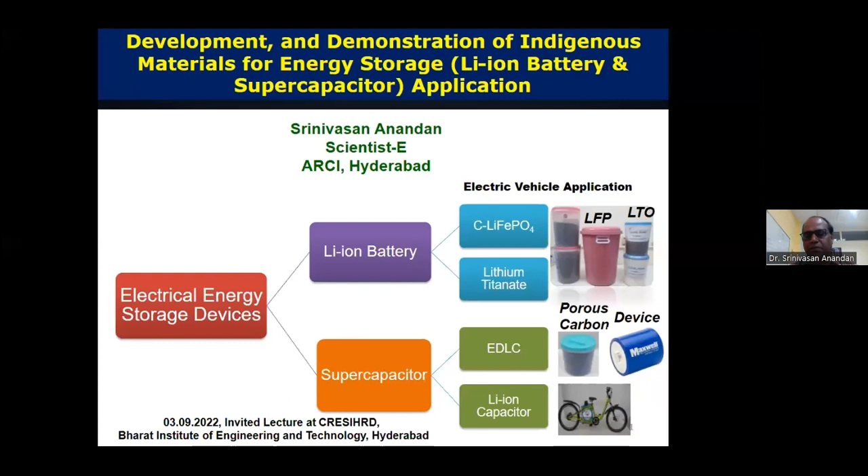Let me briefly explain about my institute. ARCI is the International Advanced Research Center for Powder Metallurgy and New Materials, an autonomous R&D institute under the Department of Science and Technology. The unique mandate of ARCI is transforming laboratory research into technology and transferring the technology to industries. ARCI has in operation 11 centers of excellence, of which 9 centers are located in Hyderabad in its main campus, and 2 centers are in Chennai.

In ARCI, we mainly focus on the development of material and new process. Subsequently, we work on upscaling of the developed process at lab scale and the fabrication of prototype. And then later, we demonstrate the prototype for field application and transfer the technology to interested industries.

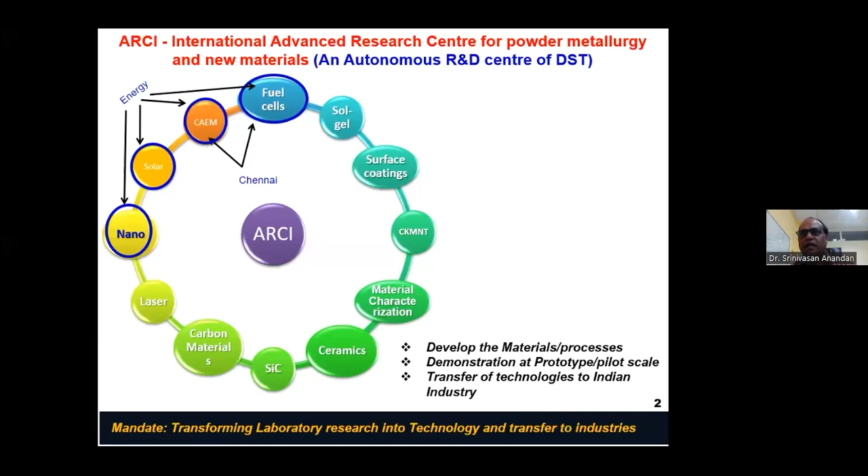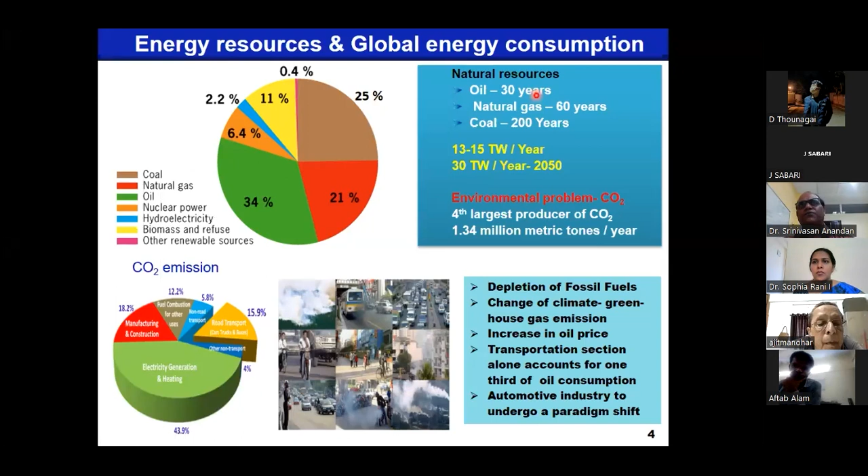The major issue is, when you are meeting this energy demand using fossil fuels, the availability of this fossil fuel is very limited. For example, oil is available for 30 years, natural gas for 60 years, and coal for 200 years.

Currently the energy requirement is 13 to 15 terawatt per year. But if you see the future energy requirement, it's nearly 30 terawatt, nearly double the requirement of what we are using right now. But if we have limited fossil fuel sources, then it is a big challenge.

And then we are forced to move out from fossil fuel to renewable energy sources to meet our energy requirement. Another major issue is that when you are using fossil fuel, a lot of greenhouse gas emission is happening. As per statistics, we are the 4th largest producer of CO2 in the world. We are emitting nearly 1.34 million metric tons per year. That is a huge amount.

There are 2 things. One is we have to move from fossil fuel to renewable sources because of depletion of fossil fuel and then climate change, global warming, all the issues happening because of burning all the fossil fuels. The other thing is, recently everyone observed that there is an increase in oil price, and the statistics say that the transportation sector alone accounts for 1/3 of oil consumption. So we keep importing oil and we are spending huge money on the oil import.

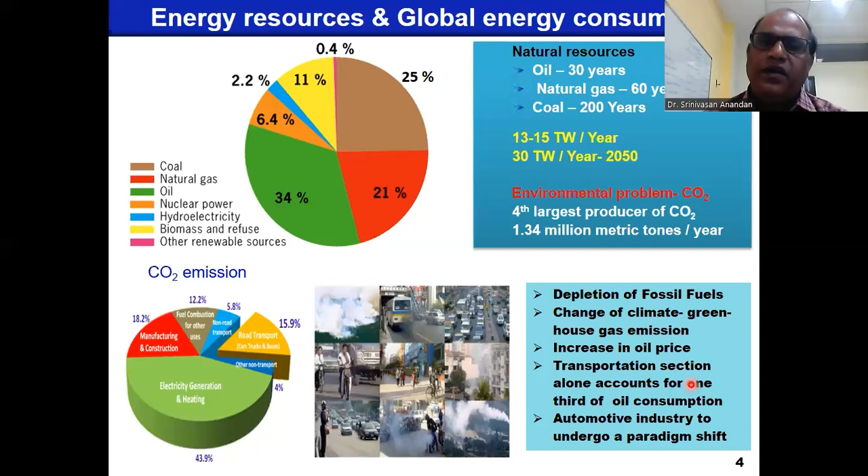And this is the high time we have to switch over from fuel-based vehicles to electric vehicles. These are the two important points. One is why we want to move from fossil fuel to renewable sources, and then the transition of fuel-based vehicles to electric vehicles. These are the two important points we have to consider for our future energy requirement.

Lithium-ion batteries and supercapacitors are considered the promising energy storage devices. Both have their own advantages and disadvantages. Lithium-ion batteries store energy through electrochemical redox reaction, so a Faradaic reaction is involved during the charging and discharging process, whereas supercapacitors store energy at the surface of the electrode. It is purely a non-Faradaic reaction. There is no chemical reaction involved during the charge and discharge process.

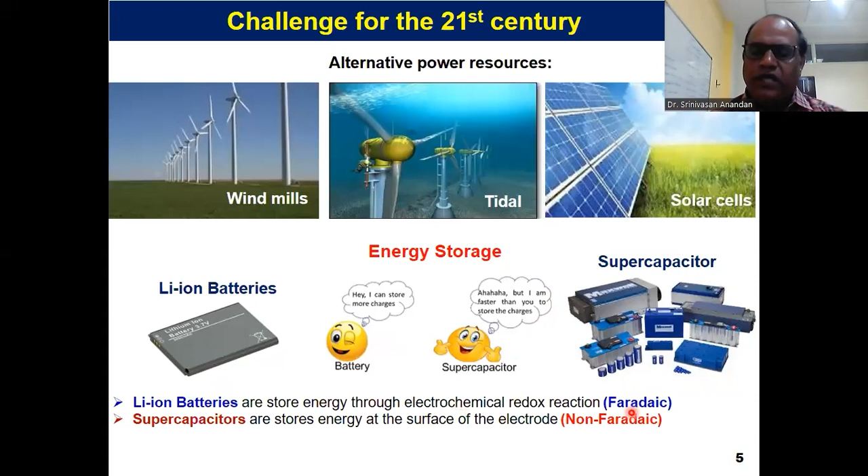Next couple of slides, I would like to explain the basic components involved in the battery and the working principles of the lithium-ion battery. When it comes to the definition, a battery is a transducer which converts the chemical energy of its active material into electrical energy through electrochemical redox reaction. Batteries are classified into two categories: primary battery and secondary battery. The former is not rechargeable, whereas the latter is rechargeable.

When it comes to components, there are four important components in the lithium-ion battery. The anode material: usually graphite, a carbon-based material, is used as the anode material. The second one is the cathode material. Usually lithium-based compounds are used as the cathode material. When you want to prepare the electrode, you have to mix it with the binder and carbon black and then coat it on aluminum foil; you will get the cathode electrode. Similarly for the anode, if you coat it on copper foil, you will get the anode electrode.

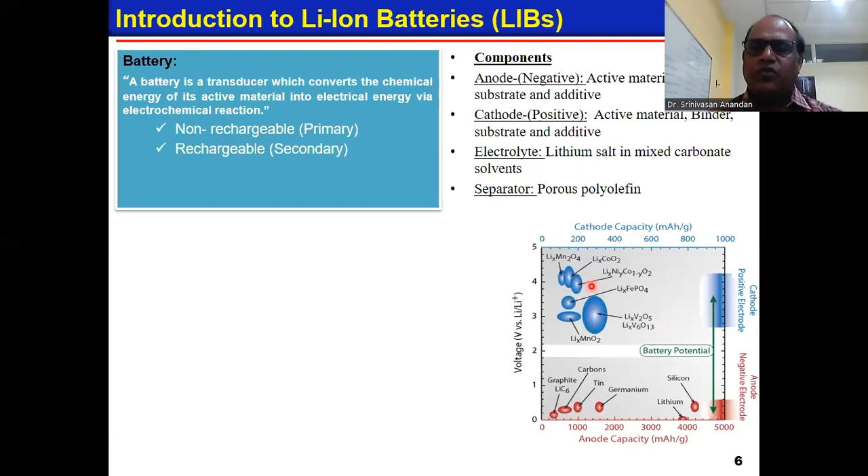The third important component is the electrolyte. Usually a lithium salt dissolved in a carbonate solvent is used as the electrolyte; LiPF6 is usually used in all lithium-ion cells. It is ionically conductive and electrically non-conductive. And then the separator, which is used to avoid a short circuit between cathode and anode. A polymer film is used as the separator. This slide shows the various cathodes and anodes which are extensively used in lithium-ion batteries. The high voltage compounds are cathode, and the low voltage compounds are anode material.

So one may ask, what is the advantage of the lithium-ion battery over other secondary batteries? If you look at the energy density of the lithium-ion battery, it is in the range of 150 to 250 watt-hour per kg, because the cell voltage of the lithium-ion battery is high. Whereas for other secondary batteries like nickel-cadmium, lead acid and so on, the energy density is not even 100 watt-hour per kg, because their cell voltage is very low.

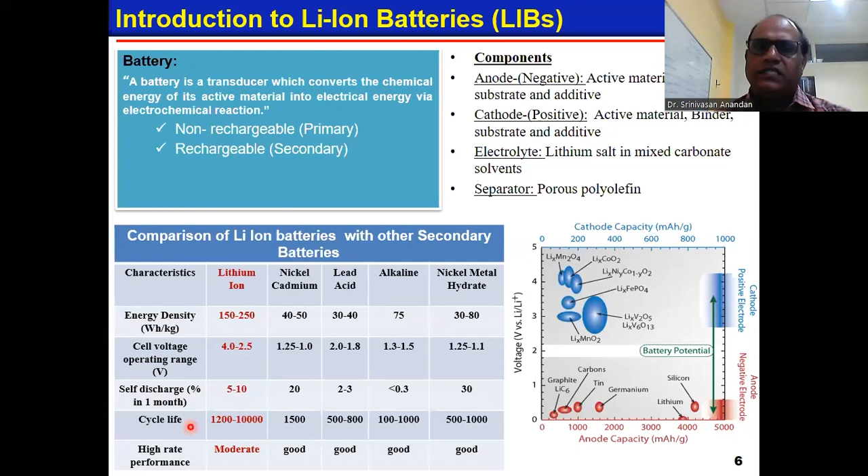Similar to energy density, other factors including self-discharge, cycle life and high rate performance are also superior compared to other secondary batteries. That is why lithium-ion batteries are extensively used in all electronic items. So in the next two slides, I'll be explaining the basic principle involved in lithium-ion batteries. As said in the earlier slide, the lithium-ion battery has four important components.

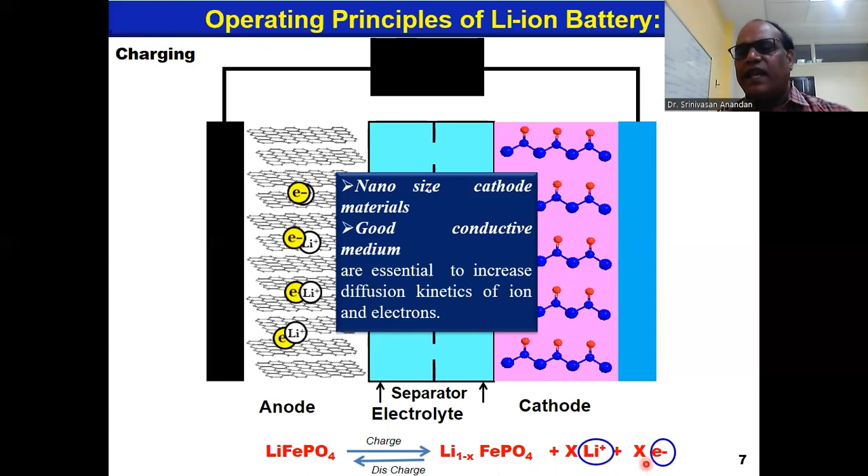Lithium ion is deintercalated from the lithium iron phosphate, and whatever lithium is generated from the cathode is intercalated into the negative electrode, and whatever electron is generated is used for charging our devices. This slide shows what is happening during discharge. Exactly the reverse thing is happening. The electron generated from the oxidation at the anode side is powering our devices. The lithium ion which was intercalated during the charge process goes back to the cathode side, and this is the mechanism involved.

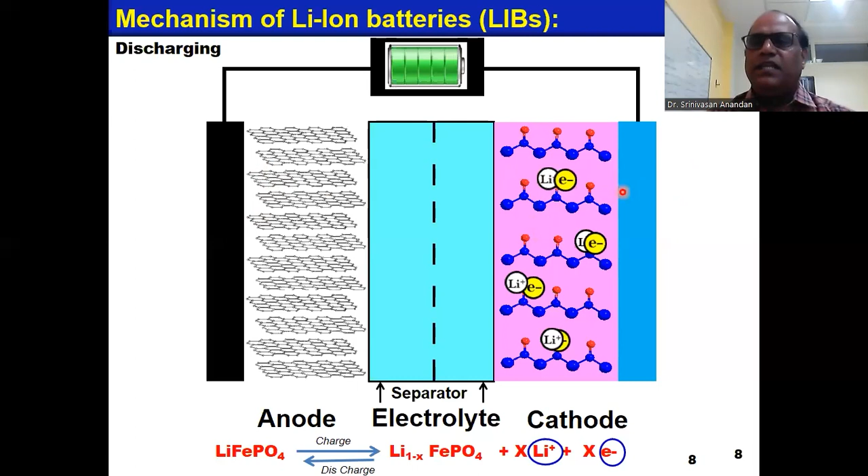So simply speaking, the charging and discharging process involves lithium ion shuttling between the cathode and the anode. During charging, intercalation takes place from cathode to anode, and during discharging, the intercalation of lithium ion takes place from anode to cathode. This is mainly because of lithium ion shuttling between cathode and anode.

Forbes India has given a very interesting statistic about the cost comparison between the fuel vehicle versus the electric vehicle, considering an average person drives 10,000 kilometers per year. For example, the cost of the electric vehicle is about 8 lakhs. Nearly half of the cost goes to the battery. Battery cost is 3 lakhs. When you are charging your electric vehicle, per charge you have to spend nearly 50 rupees. When you charge one time, you can drive nearly 100 kilometers. For driving 10,000 kilometers per year, you have to spend only 5,000 rupees per year.

On the other hand, the cost of the fuel-based vehicle is less than the electric vehicle. Considering a mileage of 10 kilometers per liter when riding within the city, and a fuel price of about 100 per liter, if you calculate the running cost for driving 10,000 kilometers per year, you have to spend nearly 1 lakh per year. So if you compare the running cost, the running cost for driving the electric vehicle is 20 times less than the running cost of the fuel-based vehicle. That is the significant advantage of using the electric vehicle.

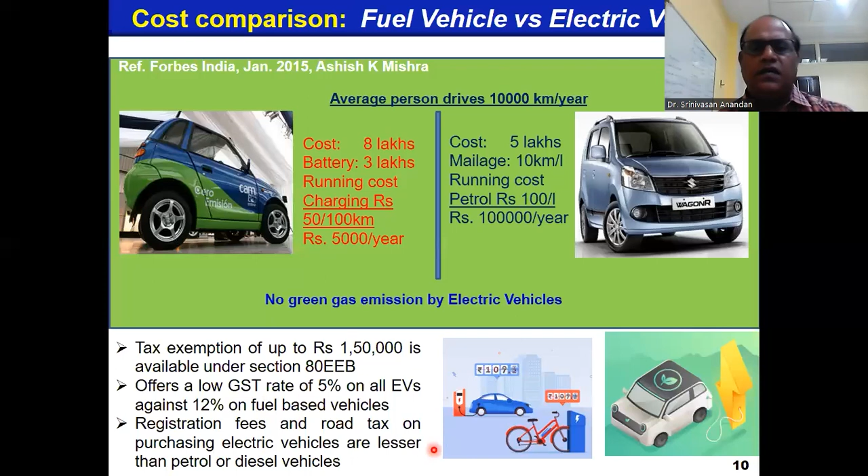The other advantage, as you know, is that there is no greenhouse gas emission when you are using an electric vehicle. And recently the government is giving a lot of benefits to customers who are buying electric vehicles. There is a tax exemption of up to rupees 1,50,000 available, and there is a reduction in GST, as well as registration fees and road tax. This way the government is trying to encourage customers to buy electric vehicles.

So you may ask why we need indigenous battery material technology. As I said earlier, current EV technologies in India are operated with imported lithium-ion battery packs. There is no single manufacturer in India to produce lithium-ion cells. Whenever you import lithium-ion batteries, it is always expensive. So in order to bring down the cost, indigenous development of battery technology is the need of the hour to bring down the cost of the lithium-ion battery or cell module.

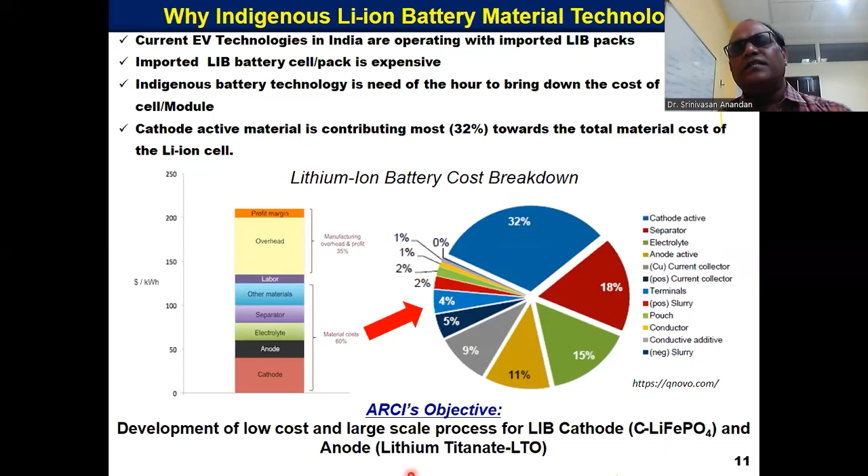And if you look at the components of a lithium-ion cell, there are various components in the lithium-ion battery. So which component or which area do we have to concentrate on to bring down the overall cost of the lithium-ion cell? This pie chart will give you the idea. If you see the pie chart, nearly 43% of the cost comes from the cathode and anode material. If we can develop cost-effective cathode and anode material, you can bring down the overall cost of the cell, and it will reflect in the final cost of the electric vehicle. That is where at ARCI we have been focusing on developing a low-cost, large-scale process for making lithium-ion battery cathode and anode material.

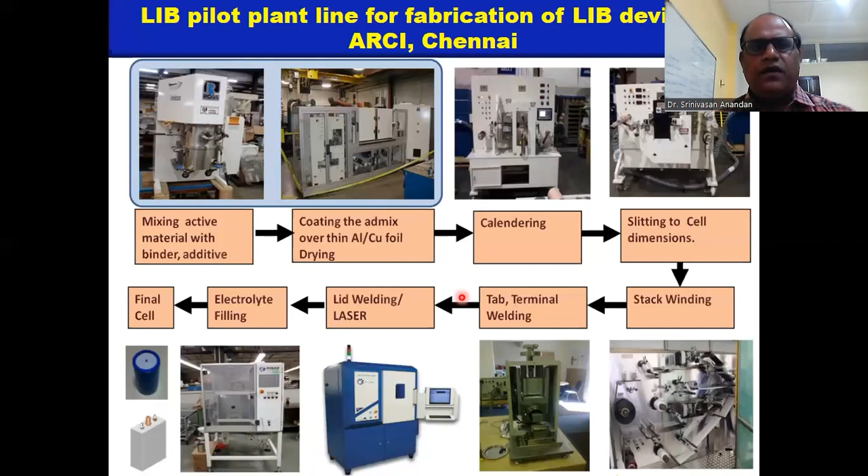So at ARCI, we have been working on two objectives. One is to set up a pilot plant facility for making lithium-ion cells. The other objective is developing indigenous material, which is used as raw material for making lithium-ion cells. This is the lithium-ion pilot plant facility which we have established at our ARCI Chennai Center. Starting from mixing, coating, calendering, all those processes, we have the equipment, and we have established this facility for converting powder into cells.

These lithium-ion based compounds are very sensitive to moisture and oxygen, and we have to use a humidity-controlled room for the fabrication of lithium-ion cells. We have established a 30% RH room and a 0.5% RH room for coating as well as lithium-ion cell fabrication. And we have extensively used the facility for making different capacities of lithium-ion cells, from 5 ampere to 50 ampere cells fabricated in our facility.

The thing is, whatever cells we made in our pilot plant facility used imported lithium-ion battery material. When you keep importing lithium-ion battery material, there are a lot of challenges. After some time, the supplier may not be ready to supply the material. Even if you insist on supply, the cost may be high. And suddenly some company may stop production. So you have to depend on someone for making lithium-ion cells. If you have your own lithium-ion battery material production, you don't need to worry about any supply chain issue for making lithium-ion cells. That is why we consider the development of indigenous materials very much essential to meet our requirement.

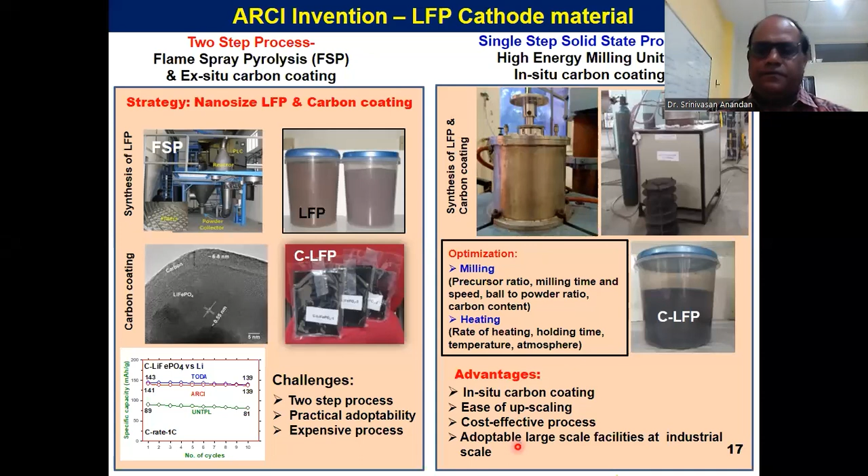This slide shows the physicochemical properties of our ARCI developed LiFePO4 material. As you can see, we were able to synthesize 50 to 100 nanometer size LiFePO4 particles, and the TEM image shows that the LiFePO4 particles are embedded in the carbon network. The carbon coated on LiFePO4 is around 5 to 6 nanometers, it is amorphous in nature, and the material has a pure olivine structure without any secondary phase formation. Here we have listed the other physicochemical parameters.

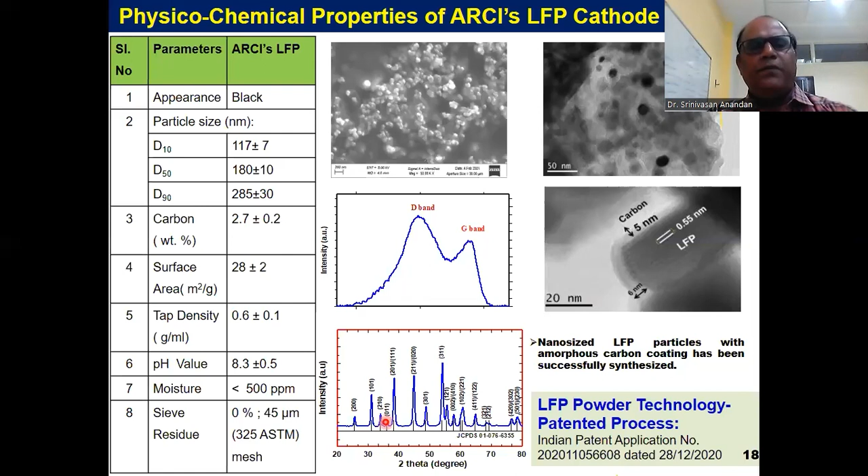Once you have developed the material at lab scale, technology is not only about lab scale R&D. You have to upscale the process developed at lab scale, so we tried a large scale demonstration of our ARCI developed LiFePO4 material. We don't have a large scale facility, so we tied up with a private industry and used their milling as well as furnace facility.

With that facility, we were able to demonstrate our ARCI developed LFP process for making 20 kg LFP per batch. This is the large scale attrition milling unit where 20 kg milling of raw material is possible, and we have done milling of 15 kg LFP raw material.

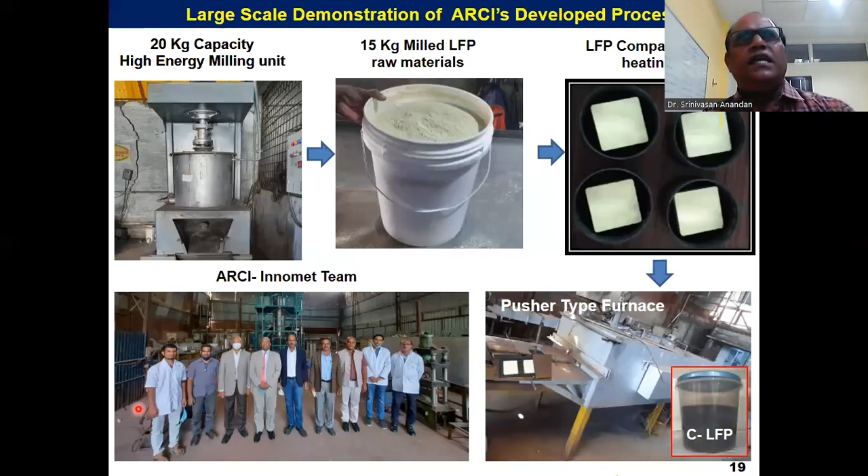Subsequently, we did the compaction of the milled material, since we apply vacuum during the heating, and if you use powder, it may fly. That is the reason we compact, and then the compact is heated in the furnace to get the final LiFePO4. This is our entire team, the industry as well as ARCI team involved in the production of LiFePO4. Here I would like to show the performance of ARCI LFP material at coin cell level as well as in actual lithium-ion cells.

This shows the typical charge discharge profile of LiFePO4. The capacity of ARCI LFP material at 1C, meaning 1 hour for charging and 1 hour for discharging, is about 139 milliampere hour per gram, which is close to the commercial material. Whereas at the high charging rate of 5C, with hardly 12 minutes for charging and 12 minutes for discharging, ARCI material is able to deliver more than 100 milliampere hour per gram, whereas the commercial material shows less capacity, even less than 100 milliampere hour per gram.

We wanted to evaluate our material in an actual lithium-ion cell, so we fabricated a lithium-ion cell using graphite as the anode material, and this is the capacity.

So what we have done is we have compared the performance of a cell made from the commercial LFP material. This is the capacity of the ARCI cell, which is giving 1.5 ampere hour, whereas the cell made from commercial LFP gives 1.8 ampere hour, slightly higher than the ARCI cell. But if you look at the capacity retention, the ARCI cell was able to retain 92% of its initial capacity, whereas the commercial cell was able to deliver only 77% of its capacity.

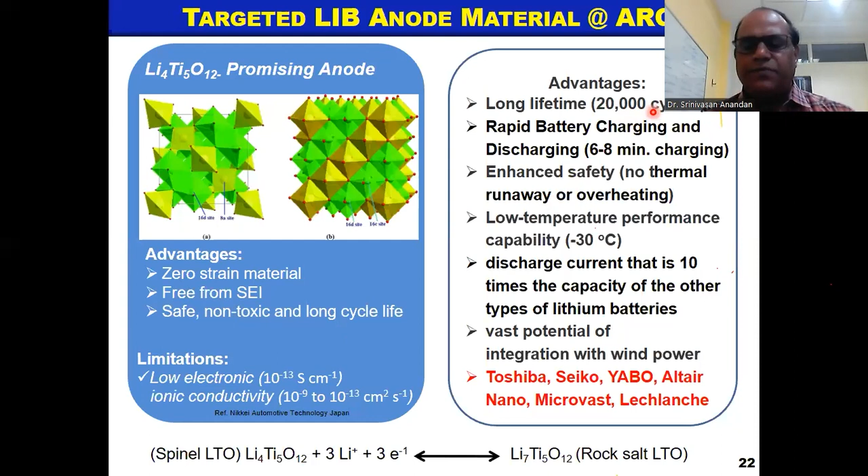Considering that aspect, we have been working on the development of lithium titanate anode material. We adopted a similar solid state process for the synthesis of lithium titanate, and we used a high energy attrition milling unit for milling the lithium and titanium raw materials. Subsequently, we did the heating to synthesize lithium titanate. And when we validated the performance, both commercial and ARCI-developed LTO material showed performance of more than 160 milliampere hour per gram. The important thing I want to highlight here

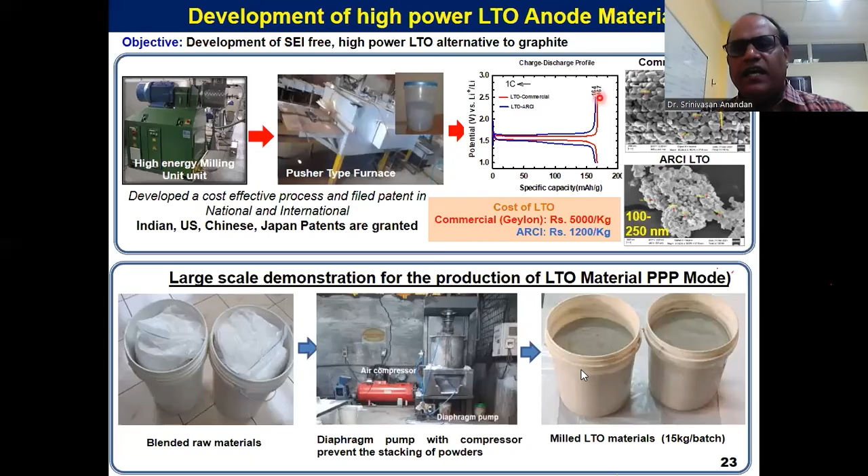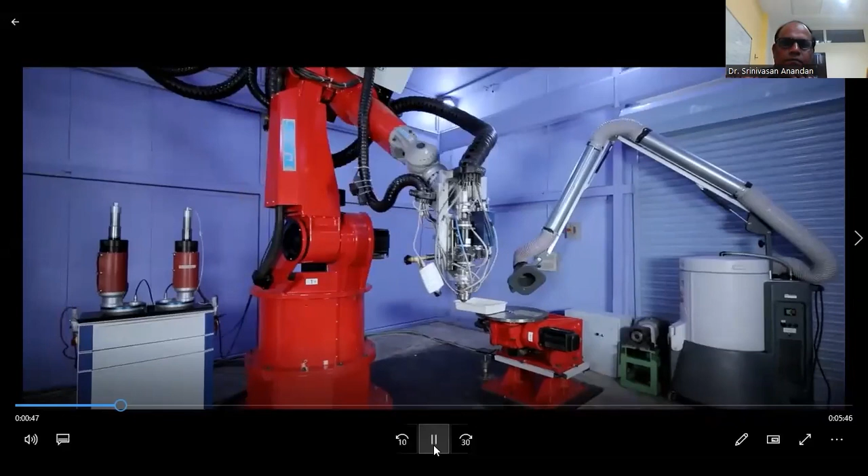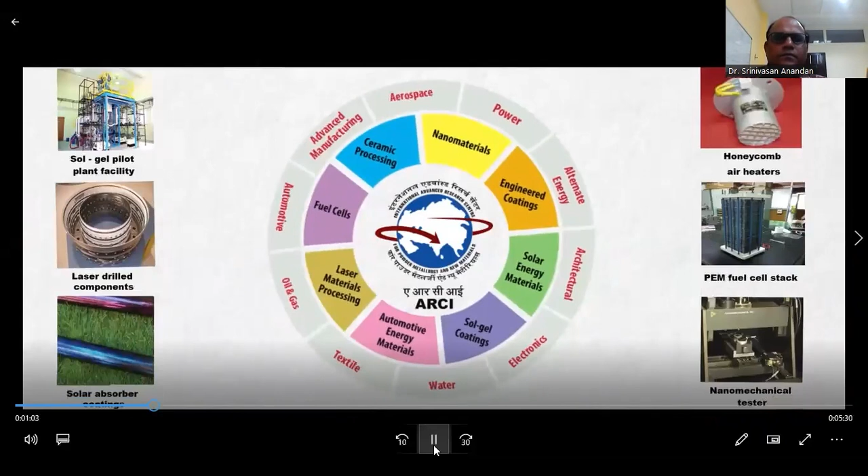ARCI, an autonomous R&D center of the Department of Science and Technology, DST, Government of India. ARCI is primarily focused on developing nationally unique technologies through its application-oriented research and transferring them to Indian industry for commercialization. ARCI has been continuously evolving the formats by which we may engage with stakeholders from other R&D labs, academic institutions, and industrial organizations to develop technologies and innovative solutions suited for the changing world. ARCI presently has 11 centers of excellence.

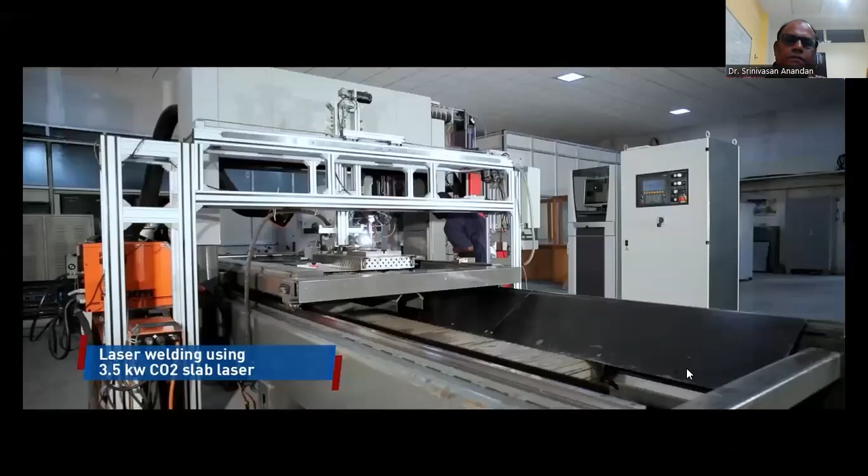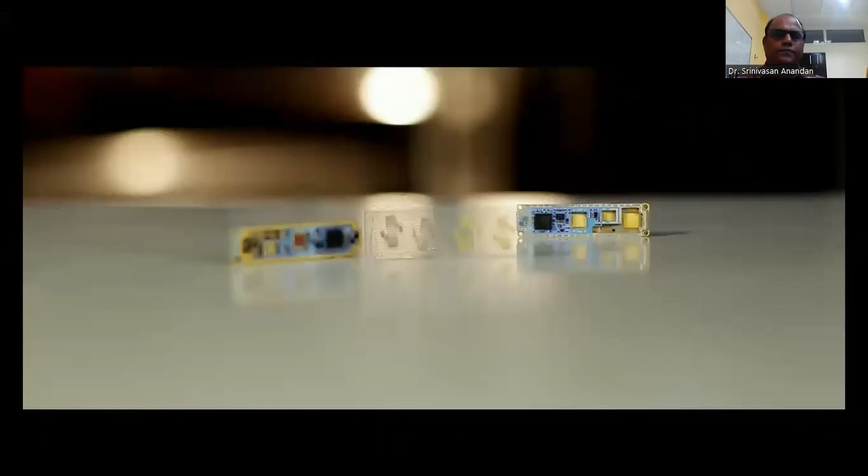Its COEs have consistently worked towards development of new materials and processes, providing solutions to industrial users and transfer of technology for commercialization, including the PEM fuel cell system for stationary and mobile applications, oxide dispersion strengthened steels for high temperature applications, nano-composite functional coatings for efficient solar thermal systems, joining technologies for automotive light weighting, coating technologies for power plants, ultra-fast laser microprocessing to create features in sub-micron sizes, high-performance ceramic components for applications ranging from energy-efficient air heaters to SiC-based substrates for optical applications.

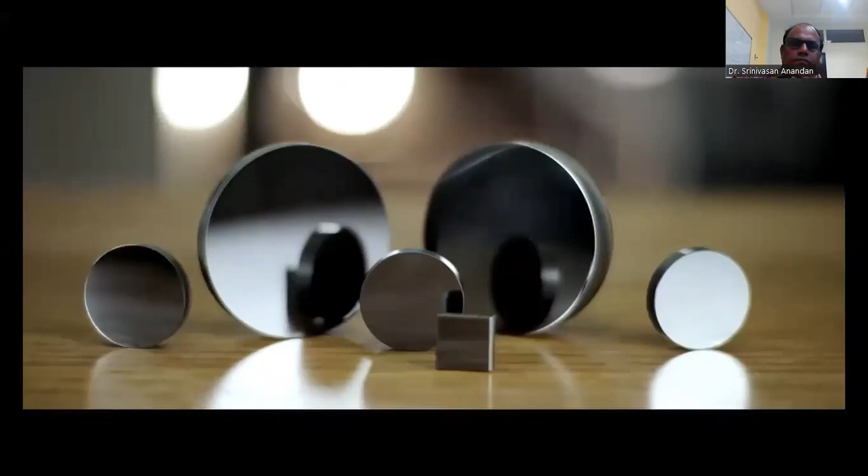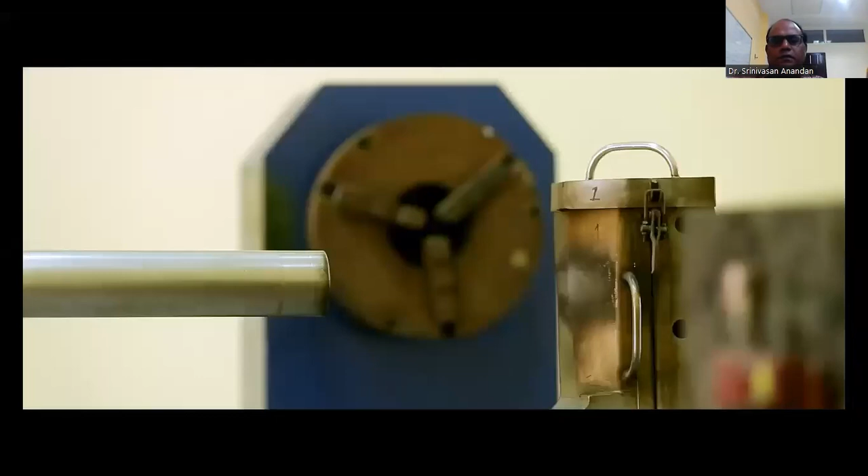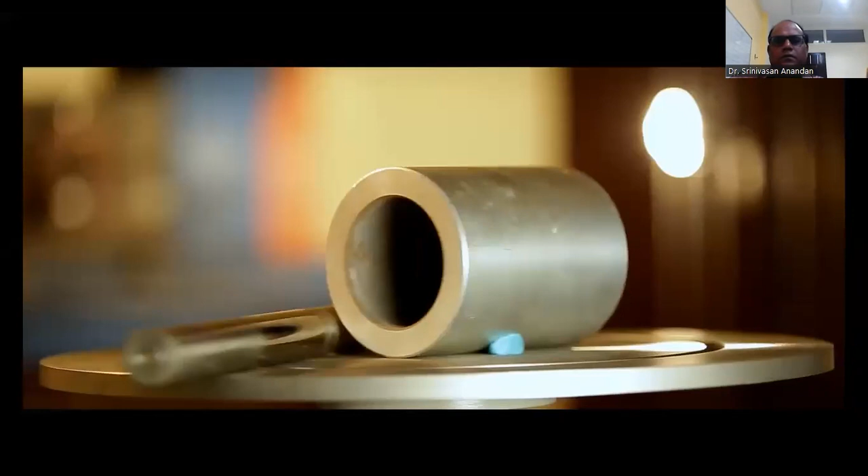True to its mantra, translating research to technology, ARCI has successfully transferred 16 technologies to 28 receivers and more than 150 technological applications for industrial and strategic use. Detonation spray coating technology in late 1990s for aerospace, textile and hydropower sectors, which is still continuing to evolve with advanced features. My experience is very good with that organization. And recently we have signed an agreement for laser cladding technology, which is a new development in the Indian market. Anti-mine boots for security personnel. Nano-materials for textile finishes with antibacterial and self-cleaning ability when exposed to sunlight.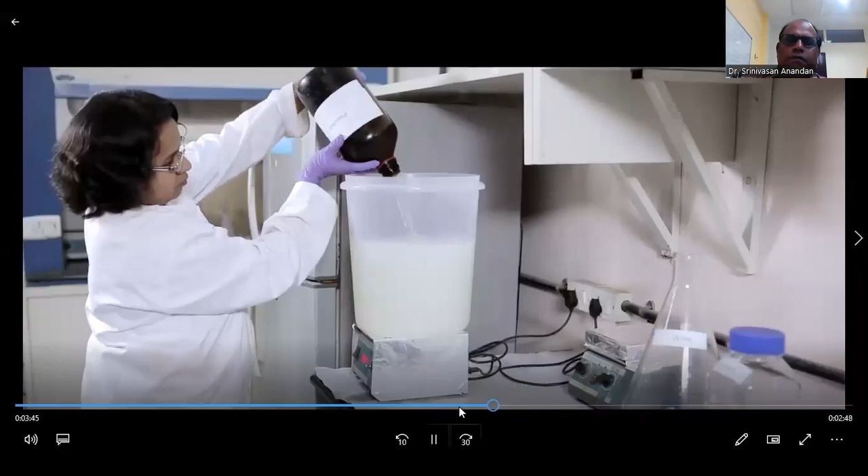ARCI is a friendly, collaborative, and competent materials partner. ARCI helped us to take this idea from mind to market. Silver technology was indigenously developed and patented worldwide. This helped in improving social wellness and hygiene. We received 2 national awards, one from TDB, another one from Nano India. We thank and appreciate ARCI for their contribution to this global project. Silica aerogel based flexible sheets with outstanding properties for industrial thermal insulation.

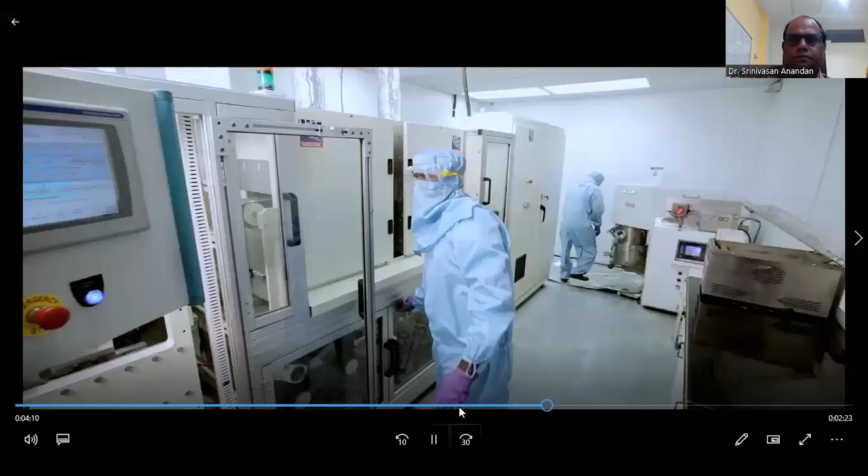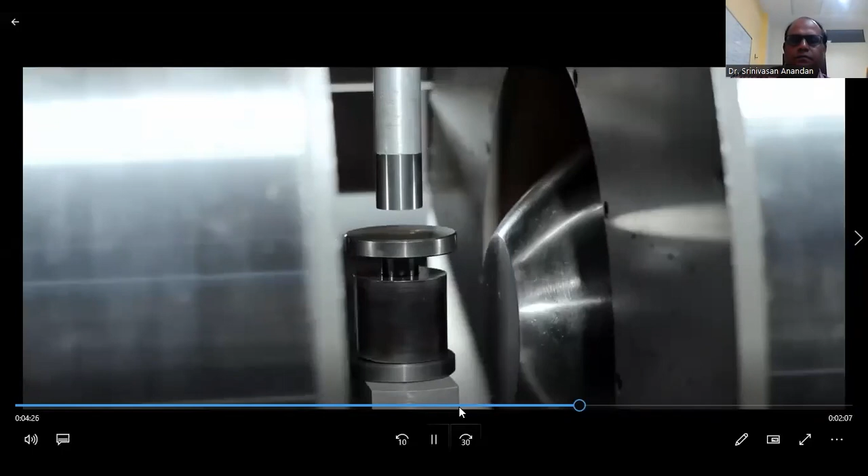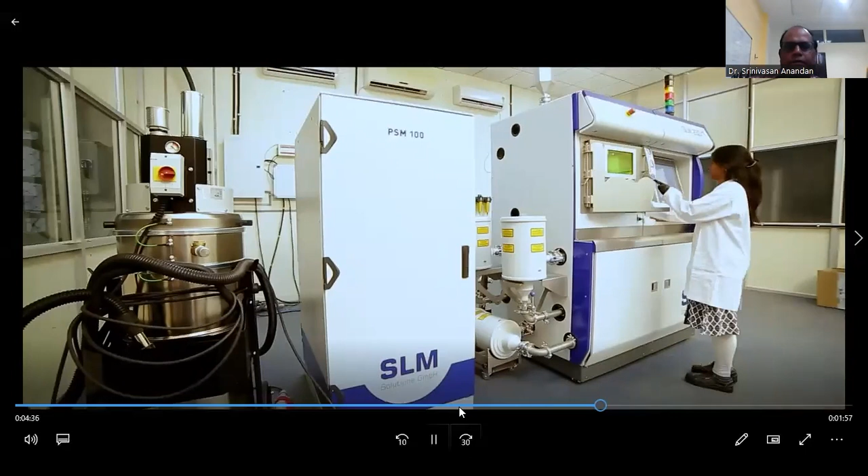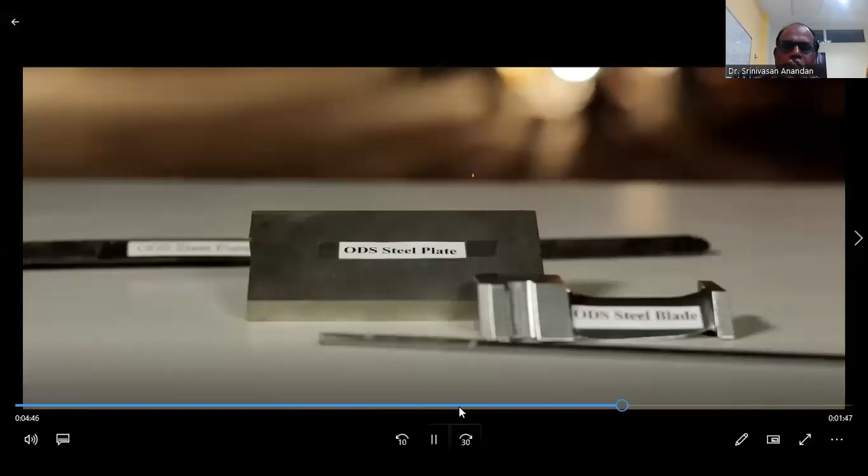Apart from these, ARCI continues to strengthen its patent portfolio with filing of more than 100 national and international patent applications. ARCI serves as a springboard for inculcating interest in young minds to opt for research as their career. There are innovative approaches in materials for energy and environment through cost-effective solar cells, storage batteries, and supercapacitors for electric vehicles, low-cost fuel cells, magnetic materials, thermoelectric devices to recover waste energy from exhaust, nano-composite coatings to replace chrome-based coatings, advanced manufacturing processes such as additive manufacturing, laser micro-machining, high-energy milling, high-performance ceramics, new steels for use in fusion reactors and supercritical thermal power plants, and improved machining tools.

ARCI 20 is now very enthusiastically poised. We would like to elevate the research enterprise at ARCI by further intensifying our interactions with industries and user organizations, other R&D institutions, and together synergistically convert our knowledge into technology which is commercializable and usable. We have also resolved to align ourselves with national missions like Make in India. The strengths and capabilities that we have built over the years, we are sure and confident that we will be able to aptly respond to any materials technology related needs of the country and the industry, and there is a promise from Team ARCI.

ARCI is evolving and innovating continuously to contribute to the field of application of materials and manufacturing technologies in general.